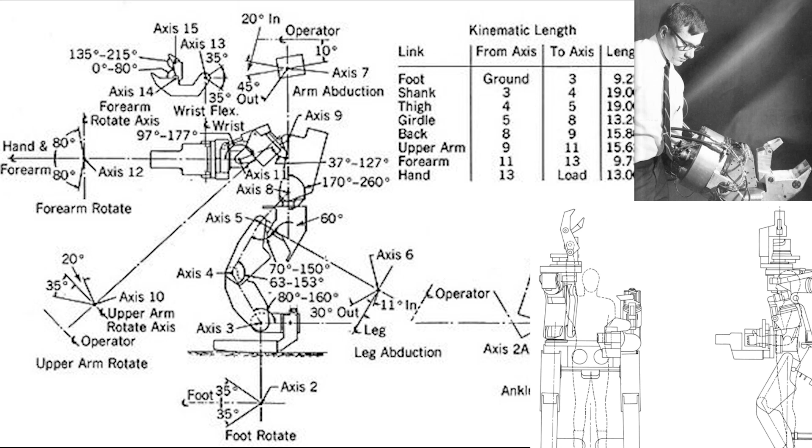This has been quite an opening curveball for me, I should say. Learning the drawings we came across are incorrect, and that there's a lot of steps having to move backwards to be able to move forwards. I've got a few things from doing my own homework to show you. I'm going to do my best to keep my videos a little shorter and not rabbit on, so I'm going right into it.

So let's shrink this down a little bit, nice and small.

Last week we were able to confirm that the drawing we were originally using is not the drawing we thought it was. This one is not Hardiman. We know for sure by looking at the evidence of the drawing itself. So sadly we cannot use that one, which was disappointing because I was quite confident it'd be a good one.

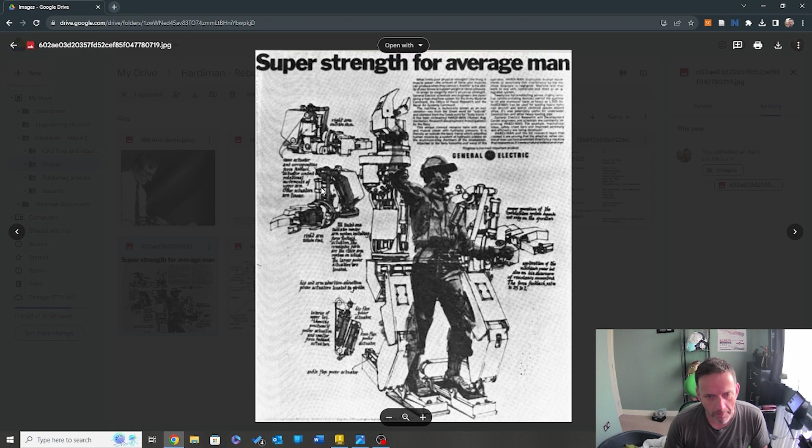So doing a bit more digging, this old newspaper article has little pieces here. It's not very clear, but you can see there's a T section where the arm actually sits. Then I was able to come across this in a book.

Again, if you look, we've now got this T section here as well. So the original presumption we're starting to make about this design means we're making the right move by going backwards.

So if that's the case, what we're now going to do is take a few steps backwards, maybe a little bit more forwards. I did come across this little bit of a gem.

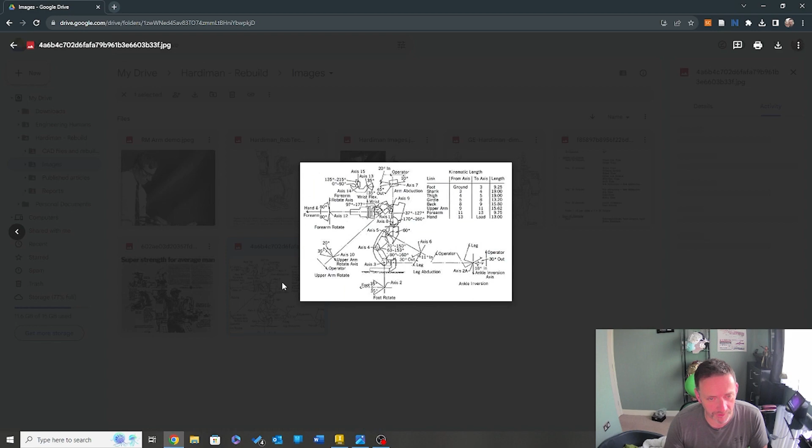I actually downloaded this one, so let me just pop this across. This gives a little more insight into the actual geometry itself. Not perfect, but it gives us the overall piece structure there. Oh my, look at that.

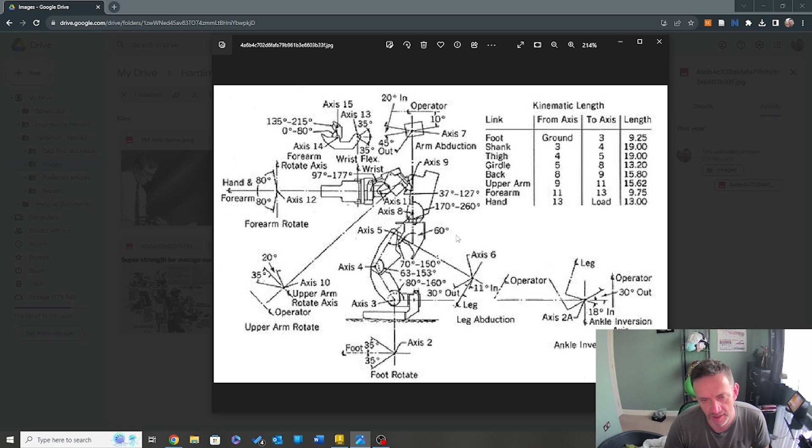So we're going to try and play around with this and see what we can get. There's a few options we can do. We could trim this image down and place it into the actual model, and then just reverse that process.

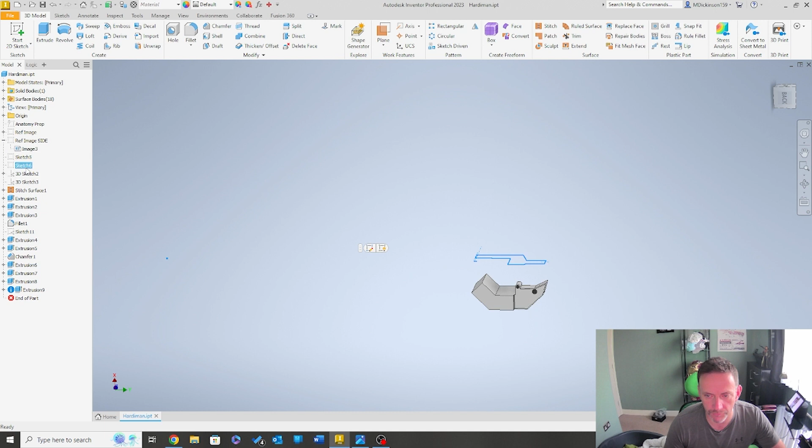So we go back up to here, and what we're actually looking for is the original anatomy pieces we're getting, and all our reference images. I don't want to jump too quickly back into changing all that out.

It took its time to get that far, didn't it? But one thing I've learned in any of these types of things is never presume that you know it's all sorted, when sometimes it really isn't.

Okay, we can see that geometric piece is probably quite a good one. What I might do, let's do a little experiment here. I'm probably going to save a copy, so I'm going to go V2.

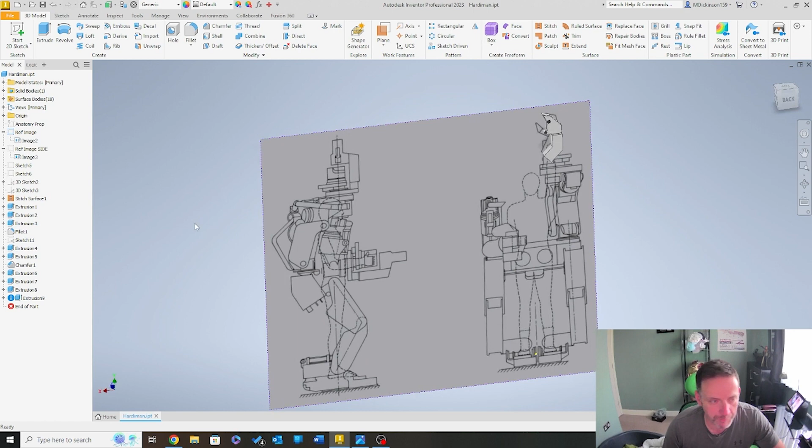With my V2, this is why I love Inventor - I mean Inventor, SolidWorks, they've all got their cons and pros with this. But what I can do is come all the way up to here and just go delete, because I'm in V1 right now.

Oh, nearly made a mistake, let me just close that. And then I'm going to reopen V2, which is what I just saved. So on my V2 now, I'm able to just go straight into here and know that V1 will at least hold its original processes.

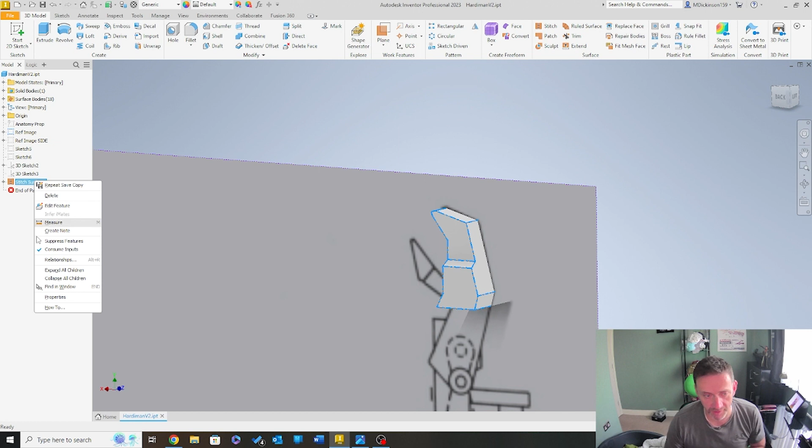So from here to here, sadly, I'm going to take these steps back. Feels like a real pain, doesn't it? You kind of go, oh what? Don't get me wrong, if it's annoying you, believe me it's annoying me just as much. I just think it's well worth taking a bit of a step back and deleting that out.

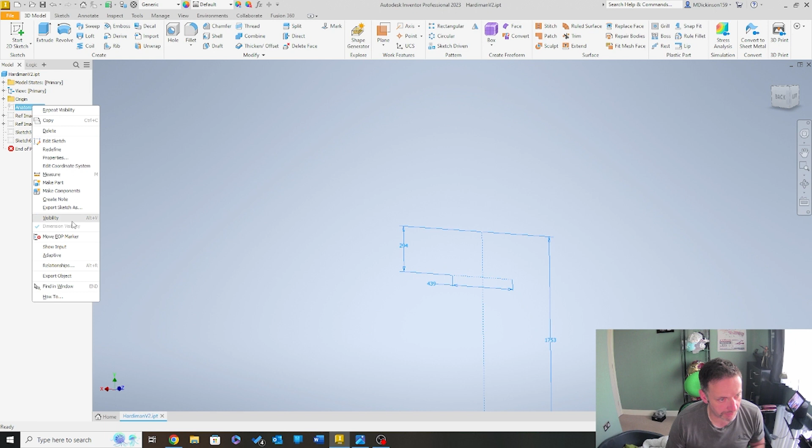Sadly, this drawing is not correct. So I'm just going to hide that out, bring in our anatomy, our original - because don't forget this is based on Moshe, based on Moshe being 5'8" from these pictures.

Now what I'm going to do is, let's have a think. The hardest thing here is we can only assume that his arm was here, or the arm would sit here.

We don't have a body in this, which is a little bit annoying. But we have no body in this.

The only thing that does worry me here is if we come back - and I'm going backwards and forwards here, as I said this was going to be a live thing, I have not practiced any of this at all.

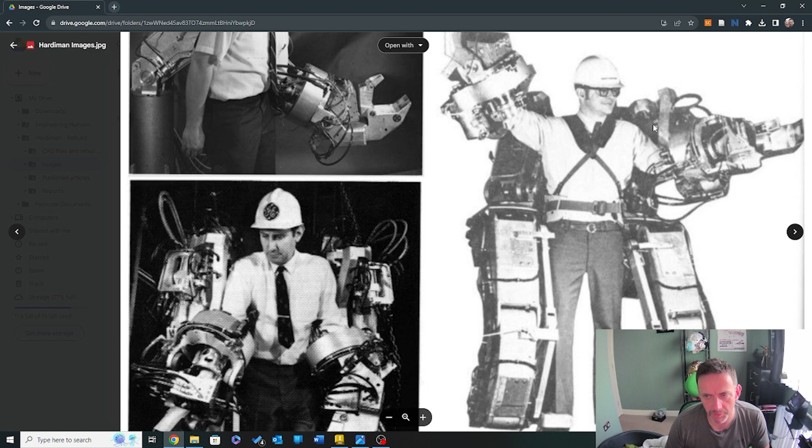So if we come back and take a look at this now, it does drop beneath his shoulders. Okay, maybe it is - I'm always really curious, conscious now of that.

This may not be what we're looking at, but based on these drawings, based on that profile, down based onto here, I'm thinking that could be our golden egg - that piece.

Side profile of that, between that and that. Let me just get that up. Side profile there to there. I think that is the golden egg in what we're looking for here. Genuinely do.

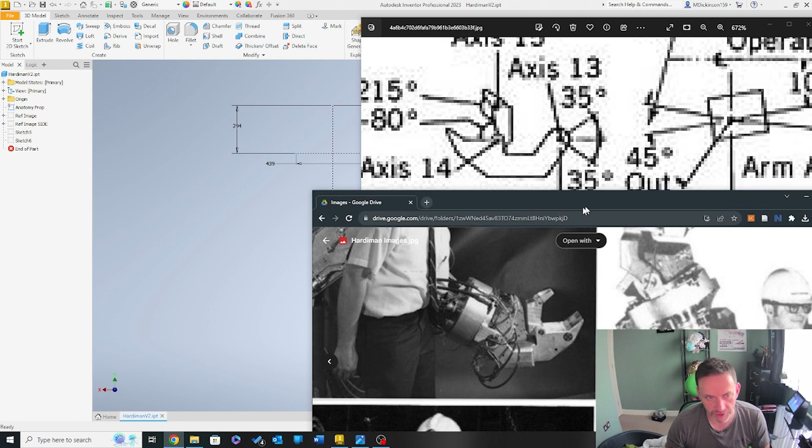Tell you what, I am going to take a step back. I'm going to go back to my original design, and I'm probably going to put this straight over the top.

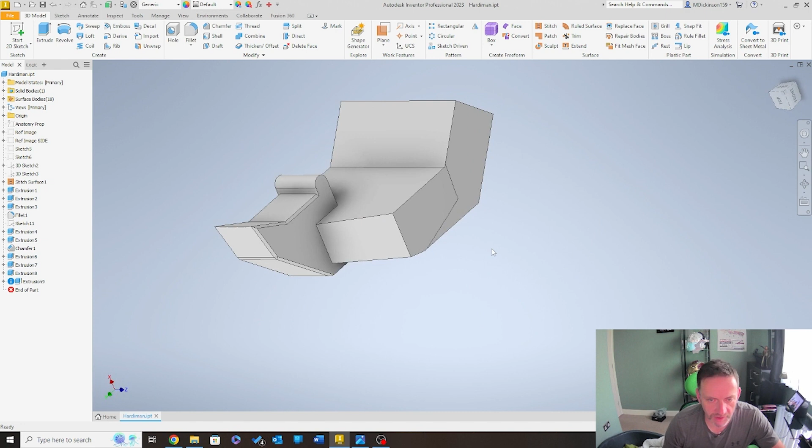So let's spin it round and let's have a look, see what we're getting. I'll come from the front plane in this case, and what I'm going to do is do like I did before. So I'm going to go sketch on this plane here. So let's go for my origins.

And I'm going to go image. Come to my image. And let me just see what I've downloaded. Where is it? There it is.

I knew this would be the case, because you remember when we first brought these images in, they all needed to be rotated and changed and things. So what I'm going to do is just rotate this to get it into position, and then I will scale it up.

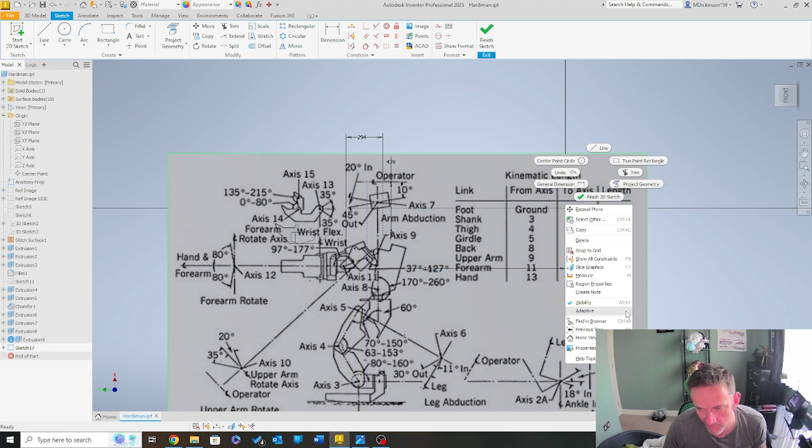Okay, so scaled it up. Got a little bit more to fit. Now let me just come to my image. I'm just going to make this image a little bit more to work with.

So let's come out here, and I'm just going to come back to my image process here, and then turn that off for a moment. See here, what I actually ended up doing was bringing in another alternate, spinning this down just to take a look. So what I'll do to my original prop, I'm just going to make that not visible anymore, make this now visible, and now what we've got is we've got geometry.

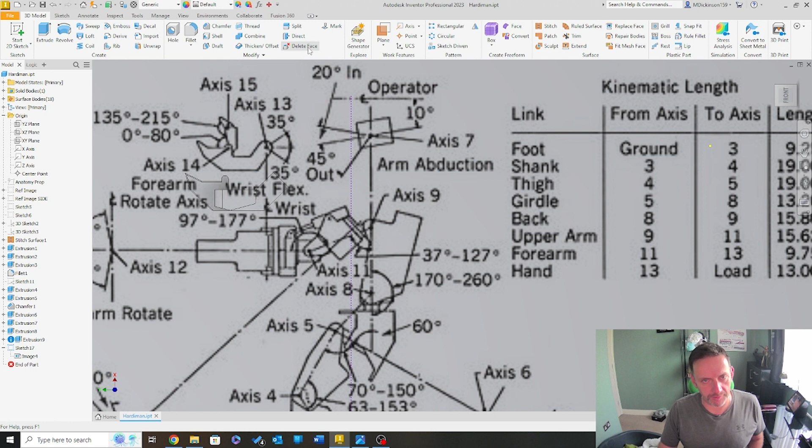Now we're in a key position now. Do we A, keep the original piece that we're chopping away at, or B, take a small hint, chop that out, and then build in that? I'm going to take the latter. I'm going to delete the entire bodies out.

I know this seems a little bit chunky what we're doing. It is very clunky what we're doing. However, I'm just determined to see, because this one looks a little bit more promising for me, this geometry. And I think using the reference images that we got, we can actually take a step back and try and find if this is the right way of doing it.

So what I'm going to do quickly is sketch probably this profile, and then because I have a key profile here to guide me, I'm going to make that a little bit more like what we're after.

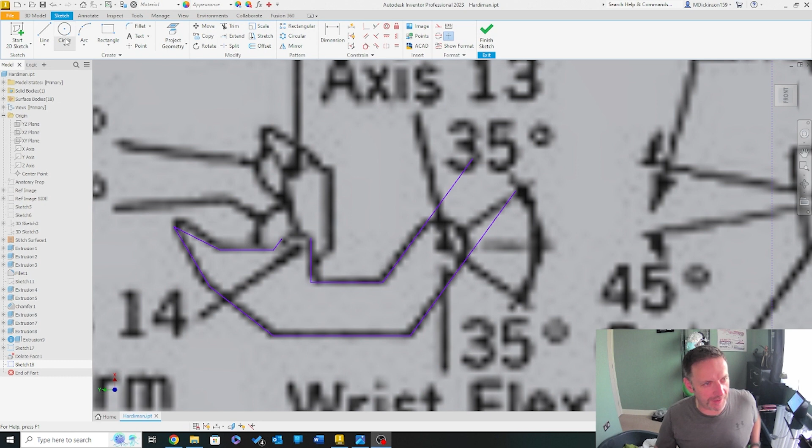So here goes. Okay, I just thought I know a few will be thinking you're cheating, turning it off like that. So what this allows me to do is just check. And what you'll see here...

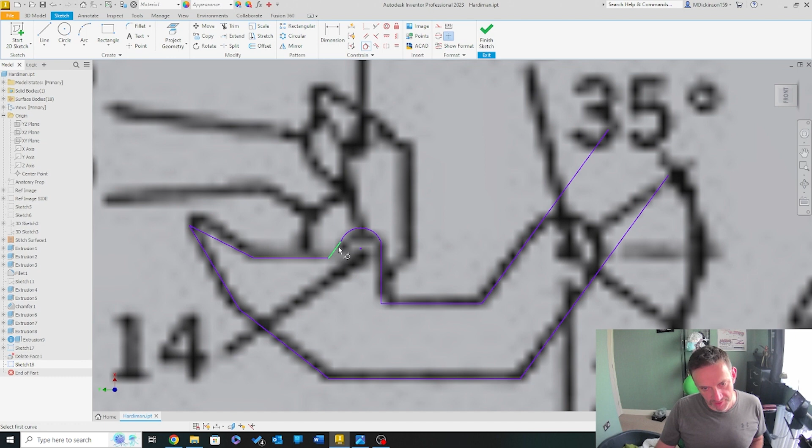is I'm just bringing in the overall pieces. So I'm going tangent here to here, and I'm going to tangent here to here. And yeah, granted, it goes like that. So what I'll do is bring you and make you one.

And amazingly, that is not quite there, is it? I mean, look at that. Bring you out, top you out here a little bit, and then because it makes me think, you know, last week chopping away that image about that model, trying to make it fit, and now you look and go, yeah, you know what? That could be the deal what we're after right now.

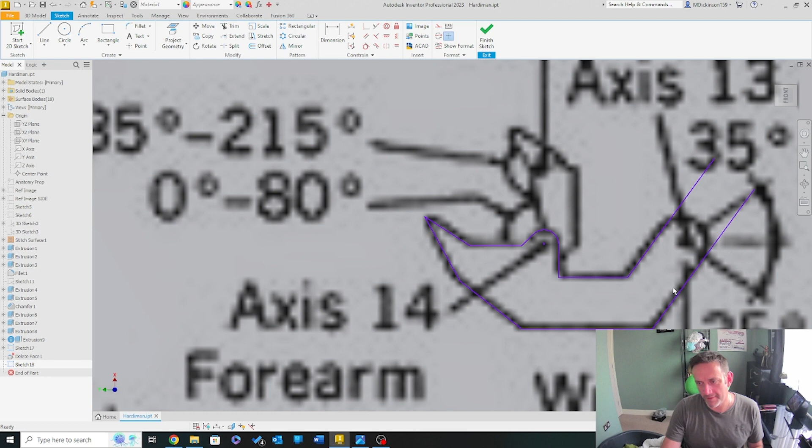Okay, so what I'll do here is place the circle in the middle and then just throw myself out like that. What I need to do is make this line and this line tangent, and this line to this line tangent. Whoops.

There's always one, is there not? So let's lock you out for a moment, and then what I'll do is tangent you to you. Okay, I'll go tangent you and you. I'll go tangent you and you.

Okay, so that's going well. It's going really well. Let's just... tell you, swear to God, and that's there like that. Was it really that hard?

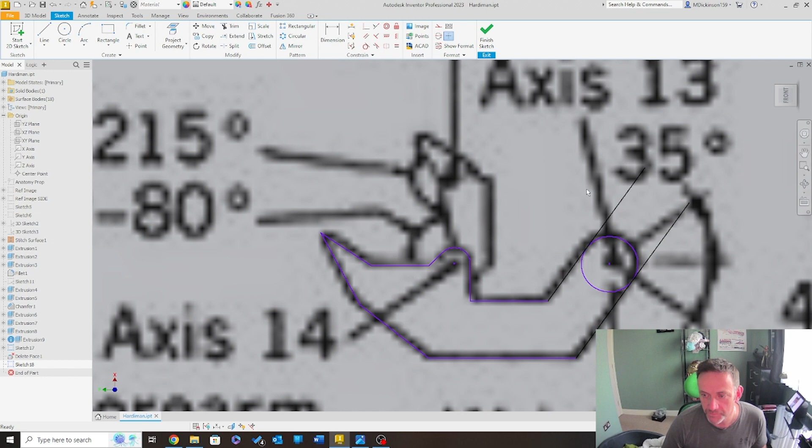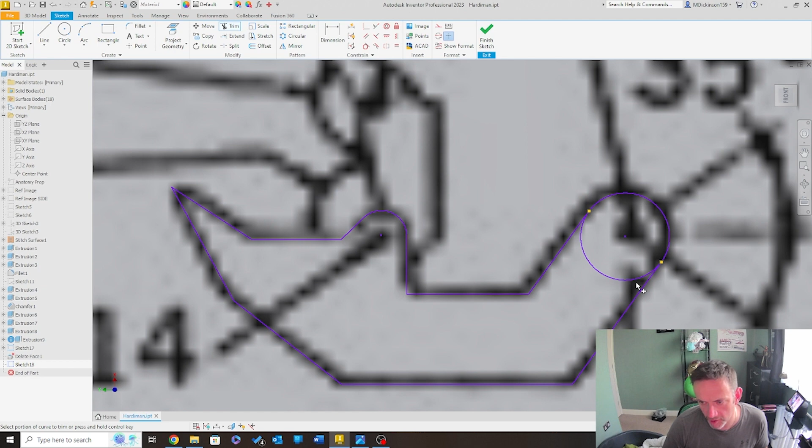I'm just going to pull them out, and pull that not tangent. Lockout wherever possible — my experience says do not leave locks on. If you have locks on, it's going to be problematic. You're going to have problems going through.

So what we get now is something a little bit more cool, am I right? This has been scaled to suit. So I'm going to do something which few of you will be thinking, 'well, that's crap' — but it's really not. I'm just going to take a dimension from here.

Now you look there, that suggests the dimension itself is 174.292 — yeah, 175. So I'm going to go 175. Let's go into extrusion, and I'm not going solid, not just yet. Also, I'm going to go mid-plane at this point — 175, we'll go in mid-plane extrusion.

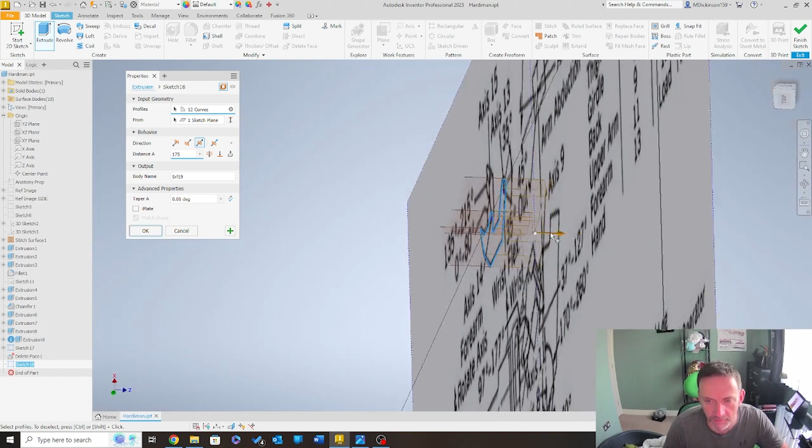Let's just tilt this over, take a look around what's going on. That, you see, that for me is looking good. It's looking really good. That's really, really what I would be after at this point. So let me just hide that for the moment.

Yeah, I'm quite pleased with that. I know you've been thinking, well, is that everything? It's really not. So let's make this back on.

What I need to do is take — there's a few ways of doing this. I really like some of these sneaky, horrible, cheeky ways of getting drawings on. So let's get some of these cheeky ways going, shall we?

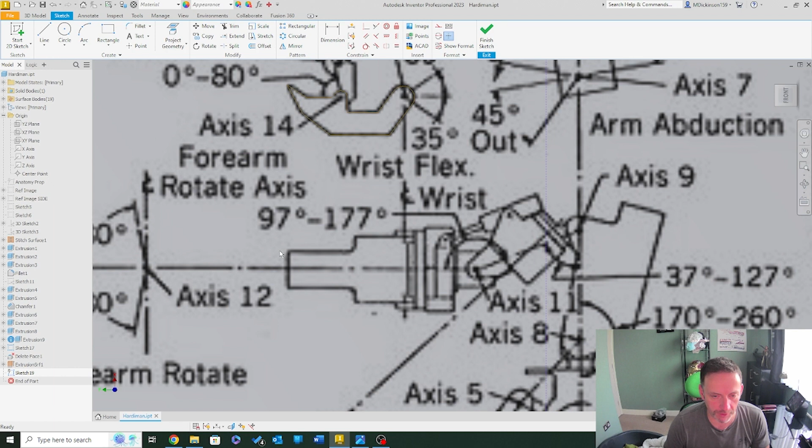Right, so we know that this is our overall geometry. We know that profile is the actual shape it should be on the downward projection. So what I'm going to do is trace it, because that's what all the cool people do.

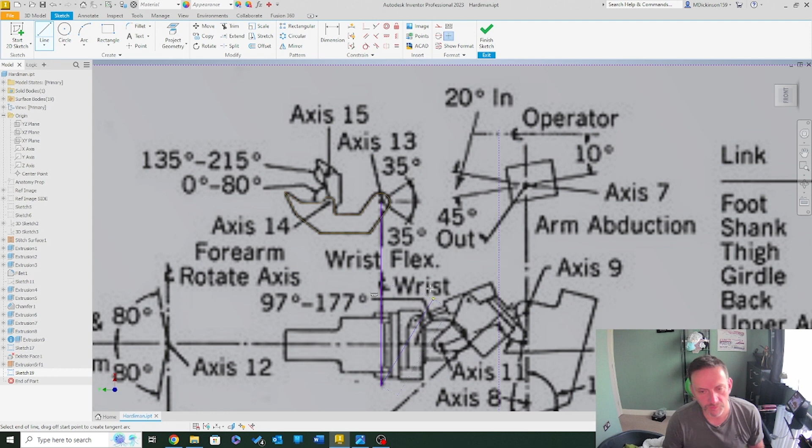I've got to laugh because I'm just really not funny. What I'll do is, first things first, take a key point for that drawing here. This now becomes for construction — all I'm doing this for is to give me an idea of where everything sits. So we know that, right?

Now look at that — this actually comes back to the original drawing when we were looking here. We're looking at that, look at that. Oh, I can't zoom in any more. But you can see there we've got a slight protrusion of the nipple. That suggests a slight protrusion. Boys and girls, we may have a winner.

But again, let's just focus on this grip. To actually get this grip over the line is too exciting right now — too exciting. So we know that we've got some key dimensions here, but let's get back to it.

So all I'm going to do is take a line to here, take a line to here, and take a line to there. I'm going to take a line to there.

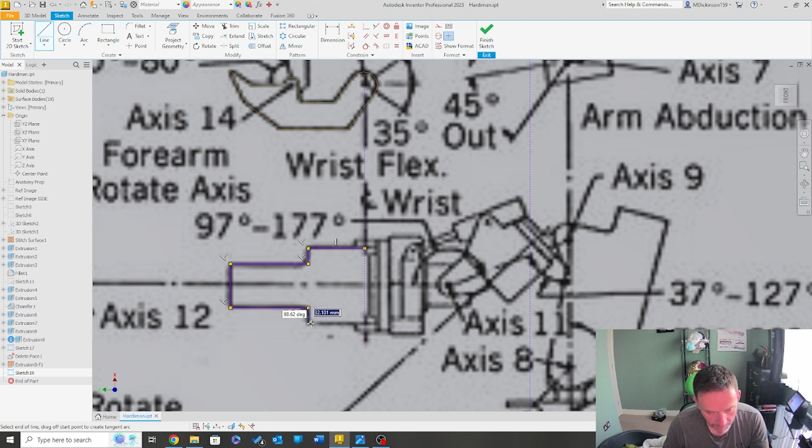Now let's go all the way — I think there's a song in that somewhere. Yeah, let's go all the way on that. Now that's to the actual ankle axis point, yes?

So what we'll do is we'll take that up there as well, take that across, and take that down. I think what I'll do, yes, I think I'm going to exploit symmetry. With what we're looking at here, we're now going to get to a position where if there are mistakes, yeah, there's going to be tears. There's just going to be tears.

So what we've got to do is try and figure out the best way of being able to get the most engineered piece. Because in many ways, what we're doing here is making it up as we go along. It's the area where everybody frowns and gets really nervous, because you are making it up as you're going along.

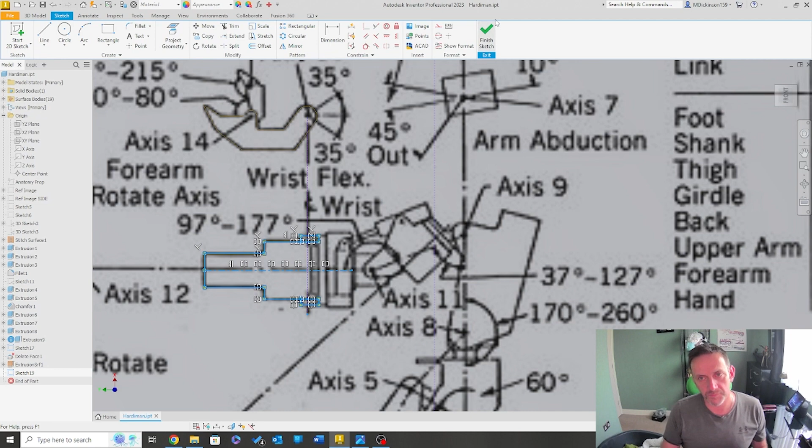Press Control and V — come on, there you go. You see here, it's taken what we had and pushed it across. Let's move the overall geometry, bring this down to here. Whoops — no, it's not what I'm after. Right, so there's something here that it's brought across.

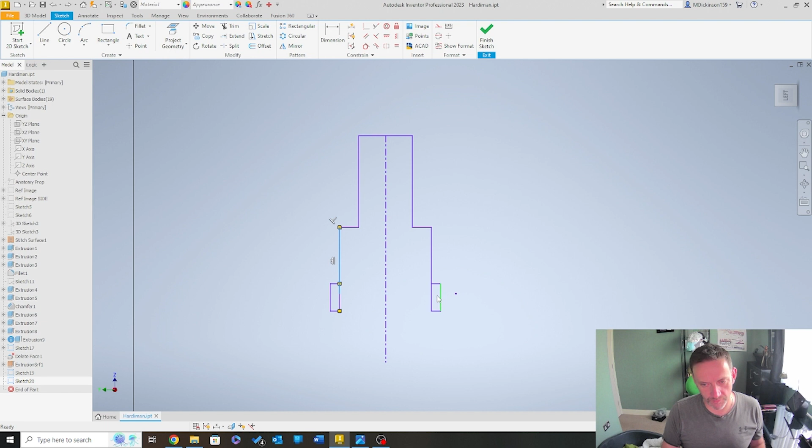I suspect it's because it has symmetry somewhere. Let's have a look — yeah, because that's a symmetrical reference, it's panicking. So what we're going to do is just take that half and move it. If I take the whole half here and just move it — you see there, it's now said, okay, cool, I can do that.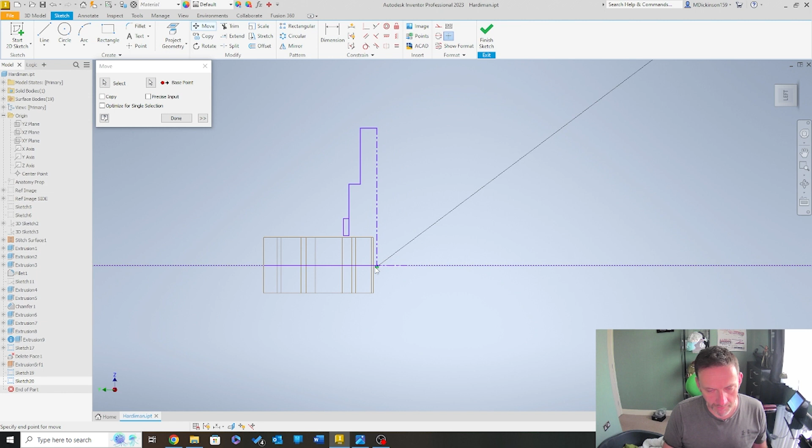So now what I'm going to do is place it here, and I'm going to rotate my geometry from the base point here. And no — whoops, I'm just going to bring that 90 degrees like that. Right, so I'm going to move it.

Sorry guys, one moment. I forgot to grab the piece of geometry on this edge. Keep it for construction, that edge.

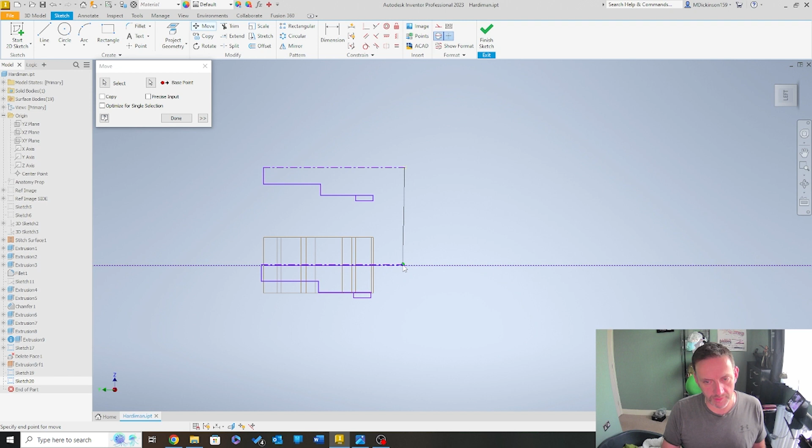What I'm now going to do is go to move the geometric piece from here, stamp it on that point. It's not... oh, you swine! It's still not snapping. Okay.

Try to come into geometry here and make that like that. So again, that's not converted the model. Well, all that's done here is just give me a point of construction that I can use, I should be able to use to assign to.

So let's get this across. Go to move, snap you onto here. See that? Finally got my snap. Didn't get my snap there.

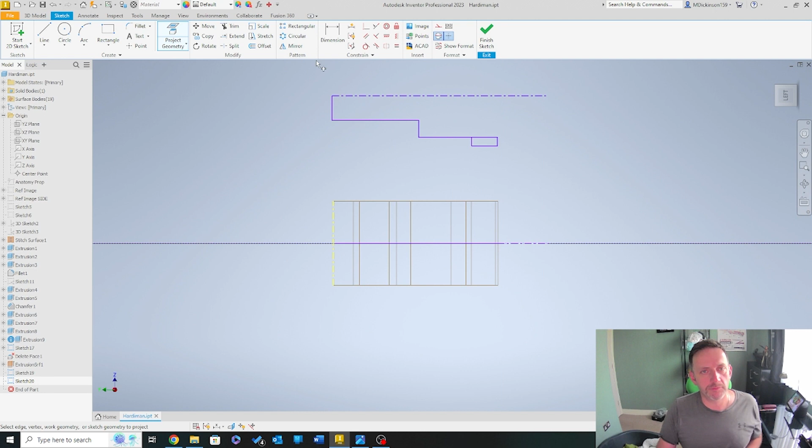One second. I'm putting too much emphasis on this, but I just want it right, you know? No, let's try that. And come from this point. She's snapping, but it's not snapping like I wanted it to.

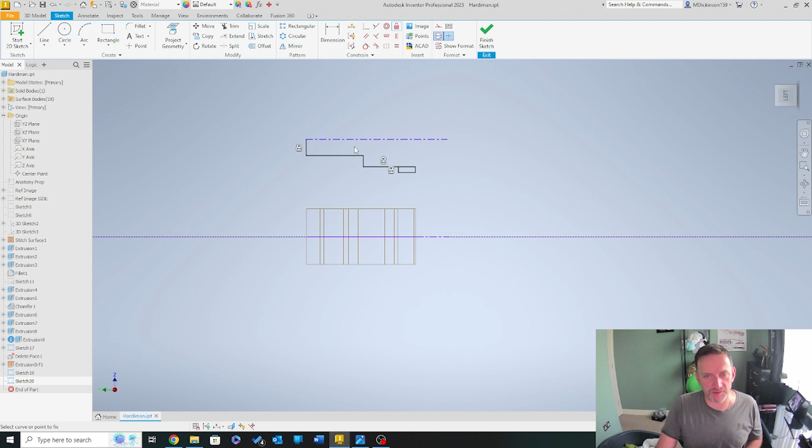Okay, so what I would like to do though is I'm going to hold the geometry in its actual piece for dimension, because as much as this is just going to be like a chopping block, I actually don't want this to change. So that's why I'm doing this. This may not allow me to move. Oops.

I'm making a real pig's ear of this one. Absolute pig's ear of this one.

So let me just spin you up. Where's that coming from? Give me a geometry there that I don't want. Okay, so let's just turn you off, and turn you off.

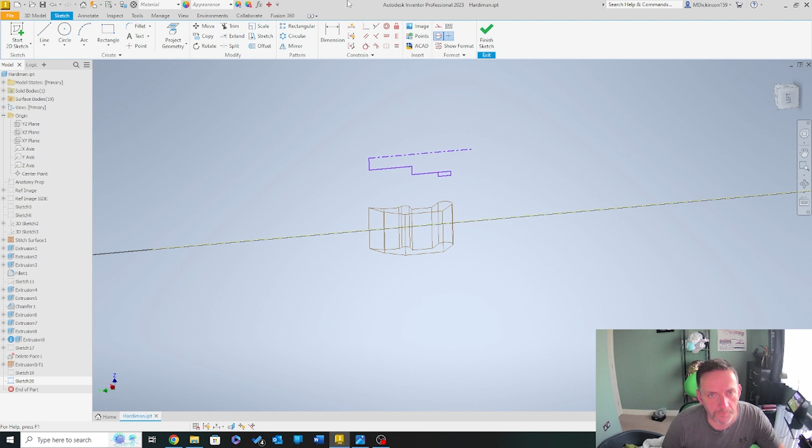There we go. Right, so I was getting all these pieces on there, and it was driving me insane. What was working, what wasn't working, what's good, what's not. My goodness gracious me, you know.

Okay, so what I'll do is I'll dimension. The reason I'm dimensioning this is I just want to hold its position. When I go to move this, it will have an absolute meltdown if I've not. And I'm just doing this for.

Oh, I don't need to do that. I'm just doing this because when I move it, I want it to hold. That's all. Have I already done that? Oh, I have already done that. Goodness. Okay, so now I'll go to move.

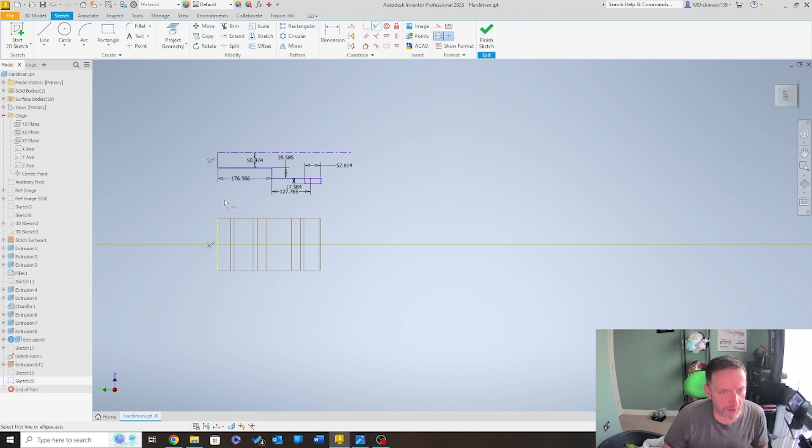In fact, first things first, I'll make this here in line with this. Oh sorry, I'll do a collinear. I'll do you and you in line. So that now holds in line. And I'm going to do collinear, you and you in line. So that now places, boom, right over the top of what we're after.

And you can see there in itself, I'd slightly missed a few things, but that is okay. What we're going to do is make this work. That's the point. So now I'm going to mirror.

I'll take this piece, this piece, this piece, this piece, and then build it all the way around. Take a center line from that point and then go apply. Okay, so we now start to get the overall geometry.

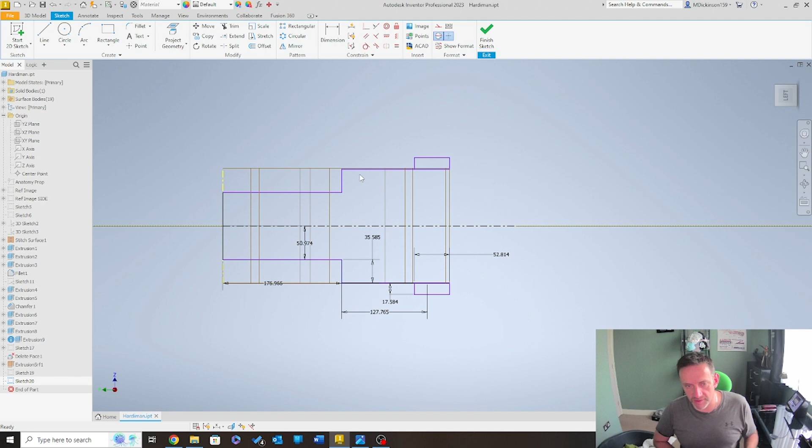I'm starting to feel a lot more confident with achieving this profile. So let's get back to it.

So what we can do is a few things. I can draw an oval shape, and I've done this many times before. So many people frown, they go, oh, can't do that. Well, you can. A lot of people don't like it, and I get that. But if you want to get some solutions, if you want to get some answers, get things going, often it's a way of doing it.

So what I'm doing here is I'm creating a window, a point that it can be chopped. So I'm going to click OK, and then let's get to some visualization. See that? That's where we're at.

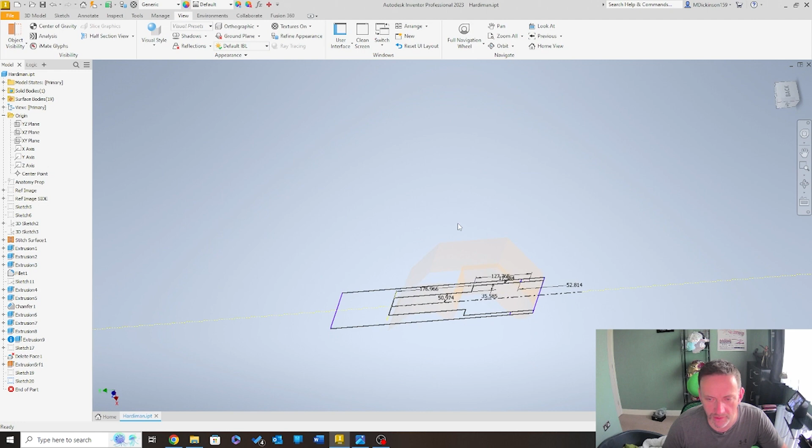That's what we've got. Now I need to start creating that famous 1960s shape. 1960s, boys and girls, that is crazy. 1960s. Anyway, yeah.

Huge. Right, cutting tool, so trimming, good. I know I'm not explaining this a lot for this one, but the idea of trimming, the tool itself, we've already created this with this sketch.

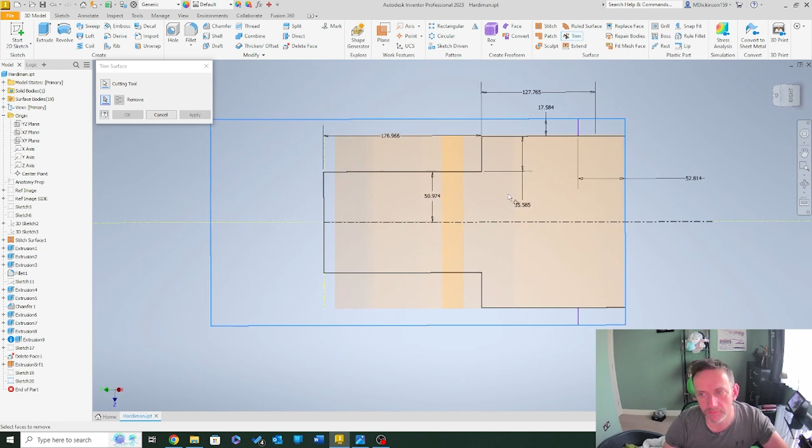And okay, so yeah, I'm going to need to go inside. So with this sketch, what I can do is start to separate things out.

So you see there, it's already highlighted key areas that can be chopped, and it's just projecting, and it's a really old school Boolean. So many people frown and they kind of go, yeah, but who uses that? Everybody uses that. It's the most useful tool in the blooming world.

Okay, now you can't really, I'm guessing you can't really see that, because I know one thing, I can't really see that, so if you can't see that, I'm sure as hell I can't really see that. Let's put some lines on there. Oh, hello. Oh my god, look at that. Oh my giddy aunt.

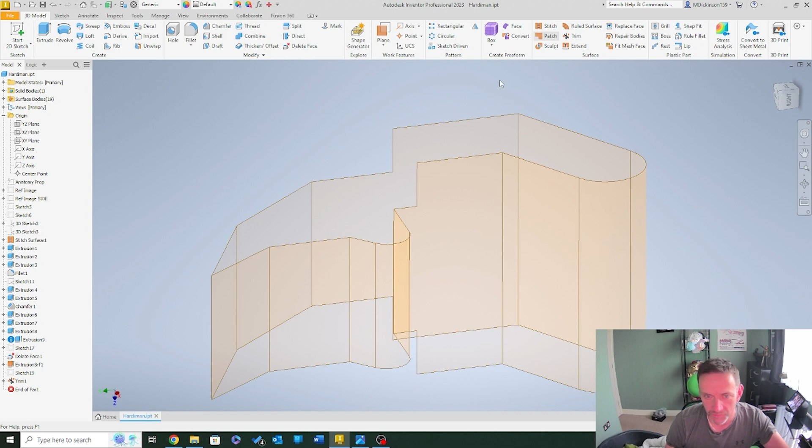Oh my god, oh my god. Okay, I'm a little bit excited right now, and if you've been on this journey of trying to figure out what decisions were made on the Hardiman with me, you'll know the waste of time the first few videos were.

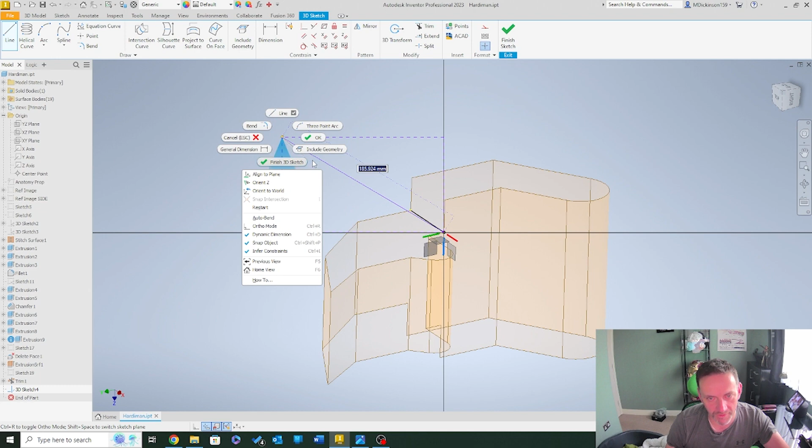Okay, oh my god, this is exciting. So let's get into here, pull it across, and then go okay. And I'll do the same again. Let's take it up to another here and here. And I'm gonna go okay.

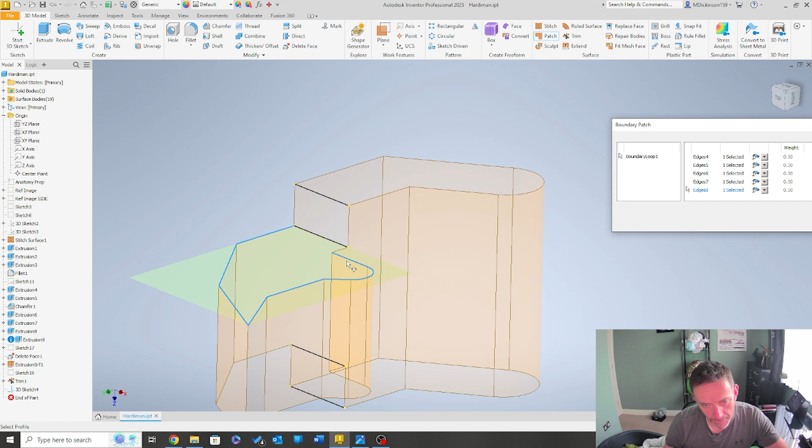Right, so let's get back to it. So I'm going to patch it in, just patching in as normal. Snap it in.

I'm really extremely pleased, if you guys aren't I'm surprised. Yeah, it appears going this decision, taking this process down, has been far more profitable than what the alternate was.

The good thing is we tried it, we've checked. Is that a drawing that's worthwhile? Is it something we can use? In short, it isn't.

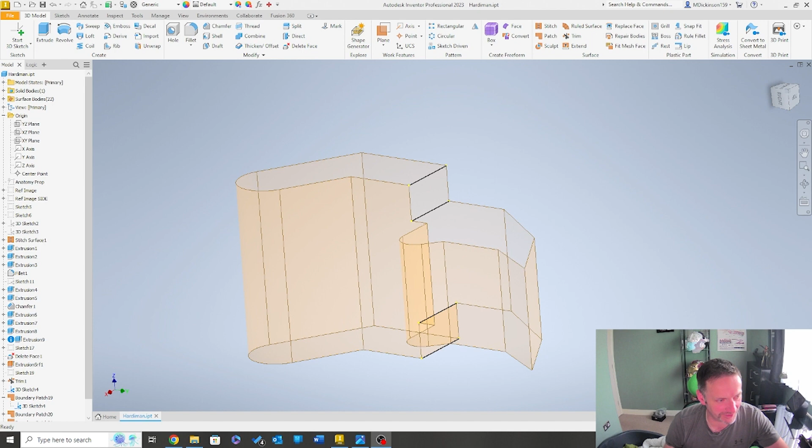However, this - oh, look at that! Oh my God, I'm so pleased with that. I am so pleased. One second, you guys, I'm gonna just get this rest finished, and then I will catch you right back.

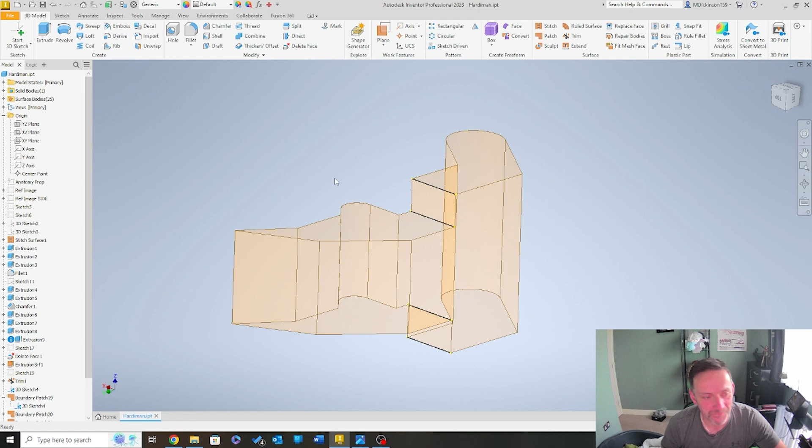Okay, so I just - whoops, wrong button, and there's me praising them. Just taking the whole thing round. I'm extremely pleased. I'm only laughing because of the amount of time we spent on the other one. I mean, I'm so happy, I'm so happy with that. That looks correct to me.

And based on what we got, we are going to have to do a little bit further homework to figure out the sizing on this to make sure it's correct. But I'm willing to bet you the geometric representation of what we're looking at here, boys and girls, is the right one, and that's extremely exciting. We could make this - just look at this piece as an overall geometric piece. I am getting that confident that if you are a UCLan student and you're following this, we can probably build at least the arm this year. That is exciting.

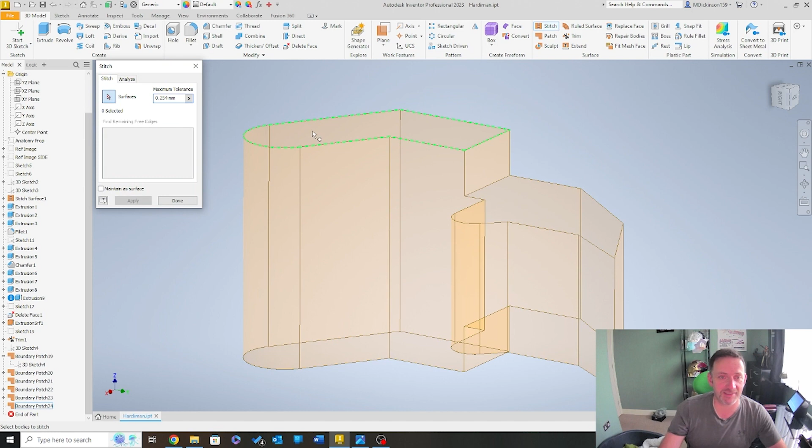If you couldn't tell. Okay, so let's go apply. Hell yeah! Look at that, look at what we got. We've got a fingernail. This is looking good, oh yeah, very pleased.

Okay, so before I get too carried away, let's get back to the original drawings. Let's get Mr. Mosher on the screen. There he is, with his big chunky arm.

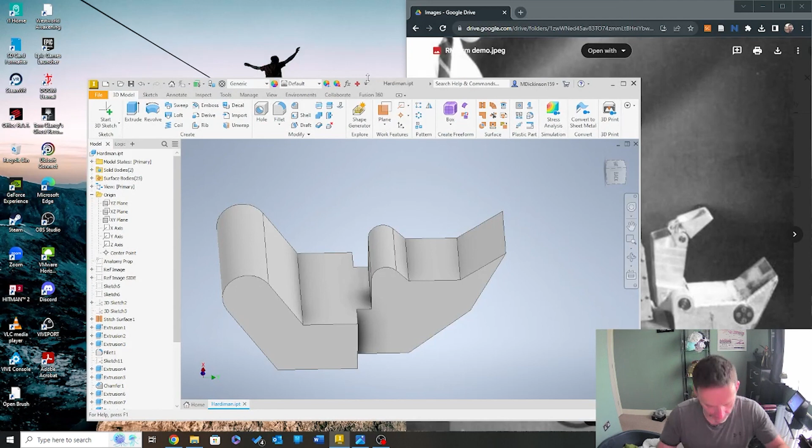See here, they've obviously got fillets on there. Fillets, I mean, we'll go with fillets - you could argue chamfers. So with that side of things, we are going to just do a little bit of oohing and ahhing to get this working. And that is a separation piece, which I think is on that little drawing that we have. But let's get on here.

Let's just quickly get some fillets on here, because I think they're there just because you couldn't leave a huge device like this with large, dangerous pieces like that - you just couldn't do it. So I think that's what we're looking at. So let's just take a piece like that, I think it's a bit bigger, so we'll go 4mm. Let's go 3mm. The same over here, like that.

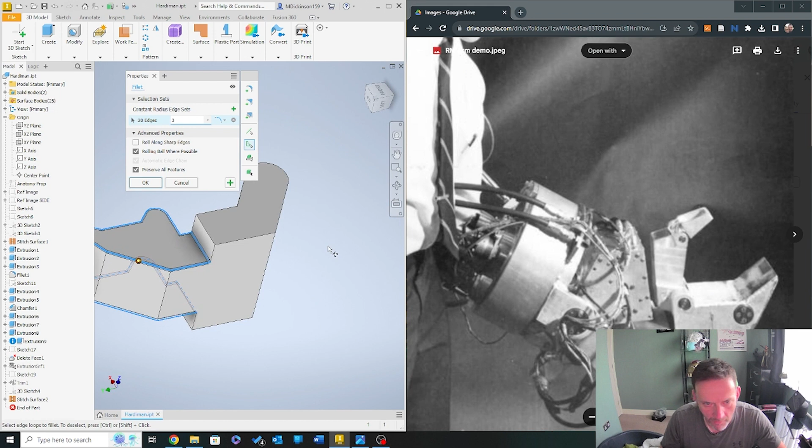Okay, so I'm going to add another. This is cool, if you've never done this before, this is really cool what it can do. Oh, I just realised something - never mind, I was just going to take it through and do it that way, but I've just realised I need quite a large radii there. So I'm probably just going to go something like 6. 6 here, 6 here. There. There.

See, I mean, they weren't daft in the 60s. You know, they were thinking about these things, these all-important elements. So I'm going around key points of that - they were thought about, people injuring themselves, scratching themselves. They were very, very good at what they were doing.

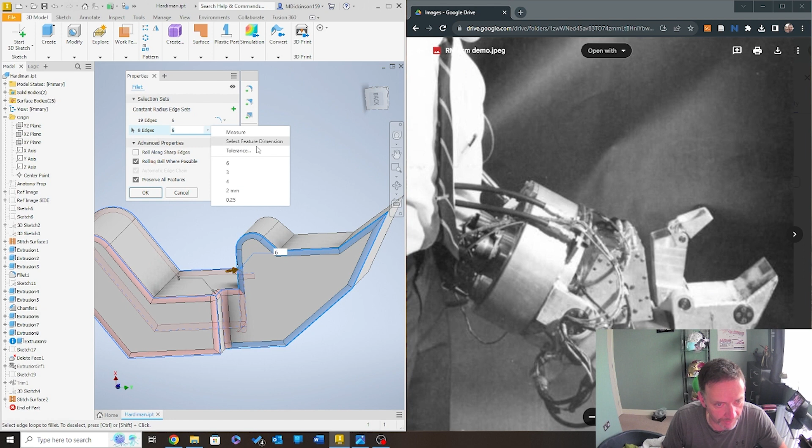And again, if you've not done already, do check out the original podcast from Bill and Nora about this. They really do a great piece on the Hardiman, and I cannot praise it enough, it's such a good one to take a look at. So I'm going to bring that back down to 3, and bring this back down to 3 there.

You see, I think it might have been on there, but oh, look at that. Right, so we look on here, and now what we're getting is, oh my God, it's starting to look good. It's looking good. Look at that.

Now that's not what I'm wanting, bigger. Pop that out, I'm going to add some more. So this now I'm probably going to put on 12, a large radii to show that overall structure and support like that. That's right, look at that. Perfect. Into that edge, onto there, and onto there.

End piece. I think it would have had a radii on there. I mean, as I was saying, I've just been praising them for being really wise and clever, and they wouldn't have made it too.

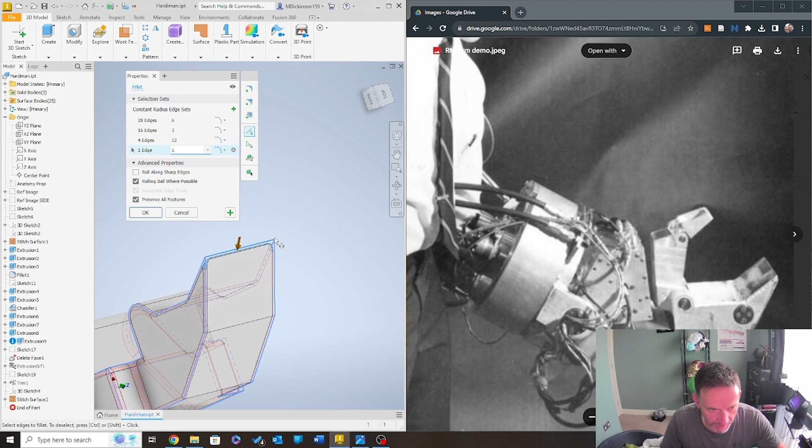Oh my God. Oh my God. Perfect. Oh, look at that. It's a little bit out, isn't it? But we can change that.

I'm looking at that section there. I'll come back to my fillet. I suspect my fillet's not done that any good. So let's come back to my 12s. I'll drop that fillet out to there. Okay, I think that's good.

I think that needs a little bit of modding, but for what we're looking at here, I'm extremely pleased. Finally, we're making some progress.

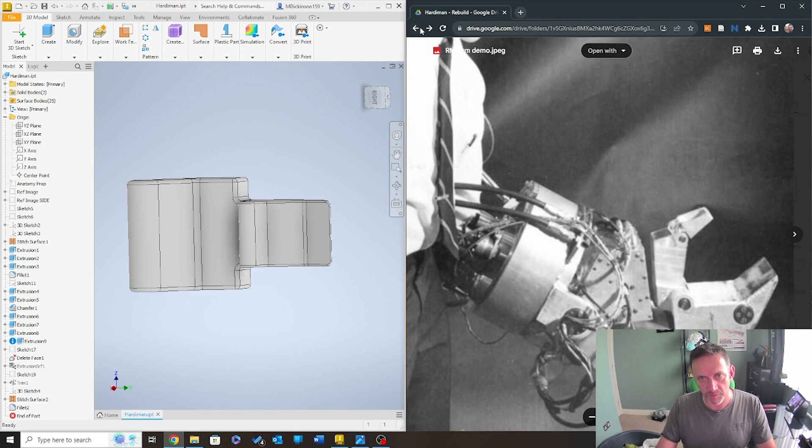And based on the actual piece, let's just pull some of the reference pieces. Before I get too excited, let's just pull some other reference pieces. Come on, there we go. Let's get back to some of the reference pieces. Let's go, engineering human. Oh no, it's Hardiman.

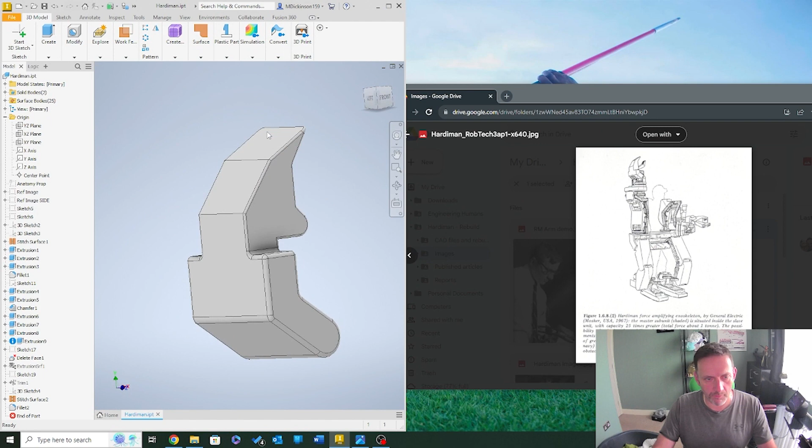Images, so under my reference pieces is here. So let's get on here. Yeah, you look at that. And you look at what we're looking at here. Yeah, happy days. Okay.

But we do need our drawing, so we need what that was attached to. Not that one. Not that one, I think it's this one. No, visible? Right, so there we go. We've got that all important piece now.

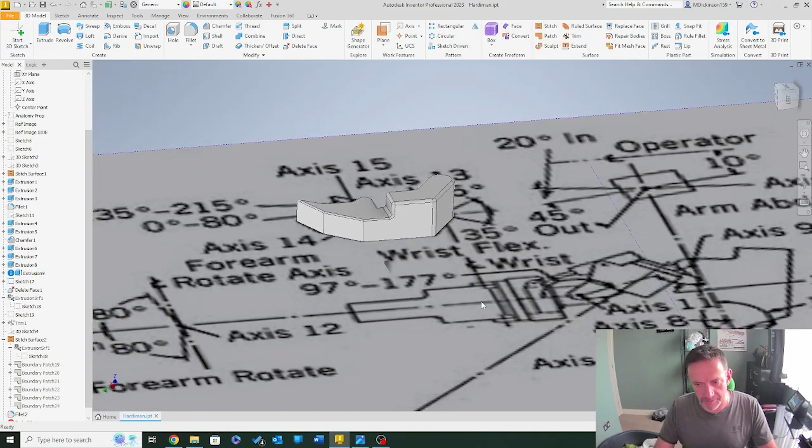What I'd like to do is perhaps build in these end knob bits, and then the problem is the end piece here. We have to make a few assumptions there. So now that that's there, now that I know that, let's hide that. And let's come back to the last drawing.

Now this is good. If we go back to the trim piece, and I open up on that trim, and just go to visible on that trim, we've got them built in.

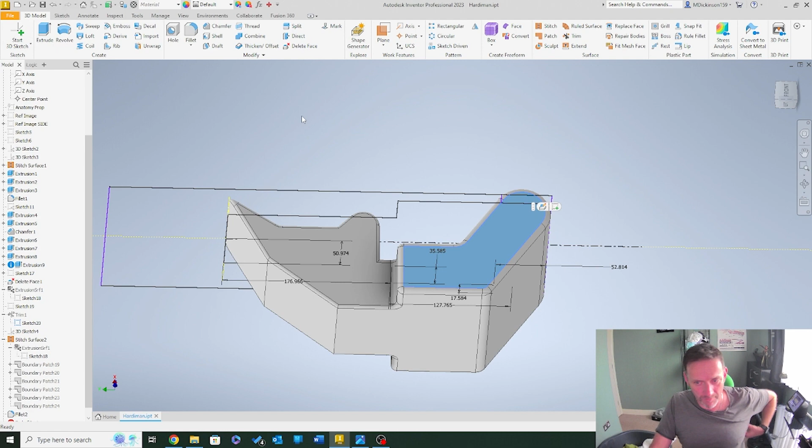And you're probably thinking, well, how are you going to do that? Simple, we're going to do a sketch. But I'll do a mid-plane sketch on the origins of this, so we're actually going here. So I come to here, and then I go on a sketch. I'm going to zoom that sketch in. And what I'll do now is just do a circle.

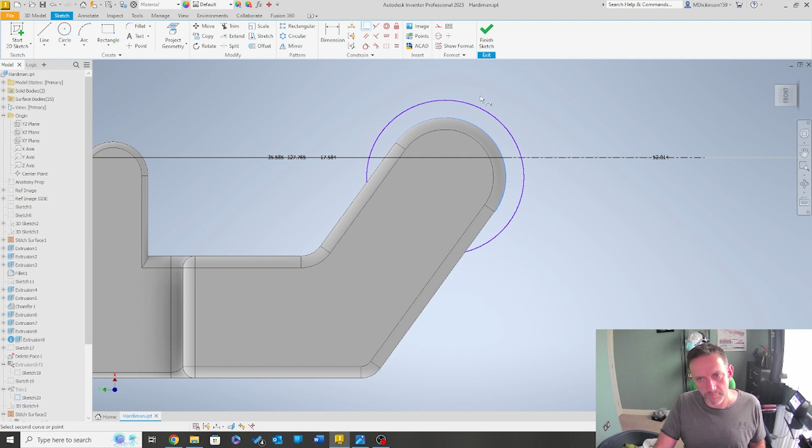And I'm going to make it tangential to, oh no, sorry, concentric. Concentric? Yeah, concentric. You know, you kind of go, does that sound right? It is, but yeah. Okay, now make them both equal, to you, right? You and you. Right, so now we've got there.

So what I'm going to do is I'm just going to do an extrude. And in my extrusion, I'm going to try and take it to the vertex. Now, let me get, where is that point? So there's two, there's 2. So I'm going to use 2. Can I use 2?

You know, you just want a point. It's like, give me a point, just give me a face edge every single time. No. No, that's never going to work there.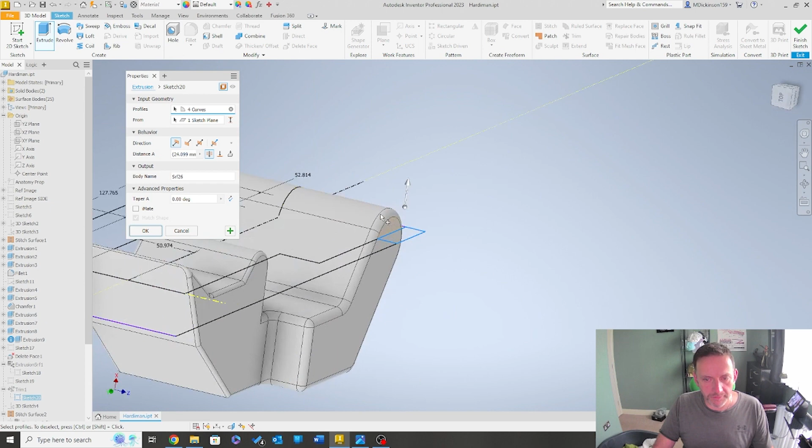Okay, okay, so I'll go curves, I'll go that curve there. And I'm going to go blind in this case. And then, because I'm now in a surface, I'm going to convert to a solid. And I'm just going to go, yeah.

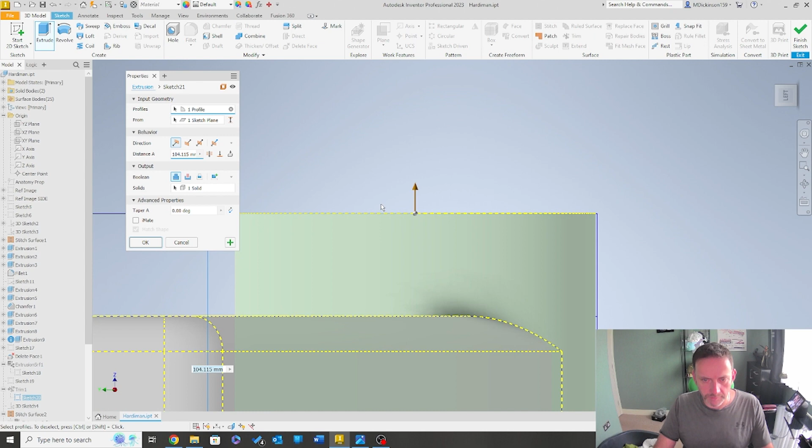Really could do with measuring this. But again, I'm going to go, okay.

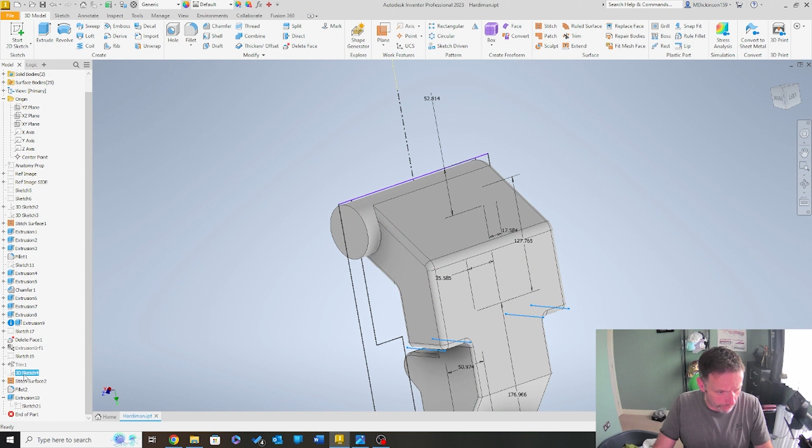Now, I hear you shout, what are you going to do for the other side? I'm going to mirror it. When in doubt, just mirror it. You know, use everything you've got to your advantage. It's all there, it's all waiting for the taking, you know. So use what you got to your advantage.

And what I'll do is I'll go to a mirror. I'm going to take this feature, and I'm going to make a mirror. I'm going to go on a mirror plane of my, let's have a look, YZ, XY, sorry. So XY plane up to there, then go okay.

Now what we got is we have the extrusion pieces that were marked on that drawing. Granted, they may be changed, we may lose them. But as long as we have them to lose them, we're in a good position.

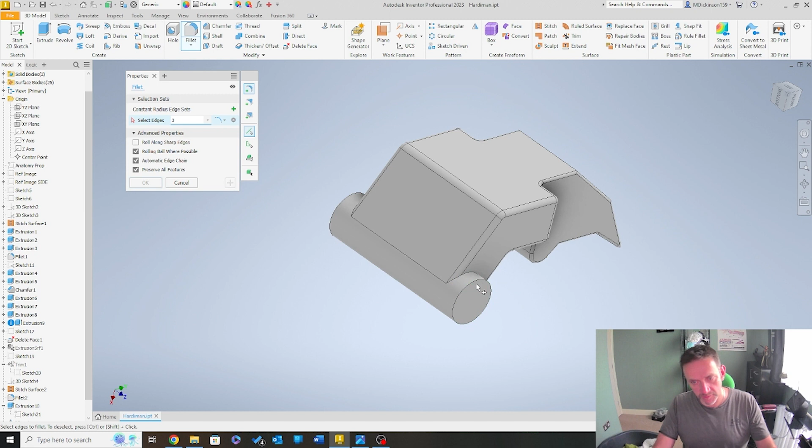So I'll go 3 on here and 3 on here. Bring that across here and bring that across here. So now we've got, oh, I'm so excited. I know, I apologize, I get overexcited, but I'm just excited to see what we've got here.

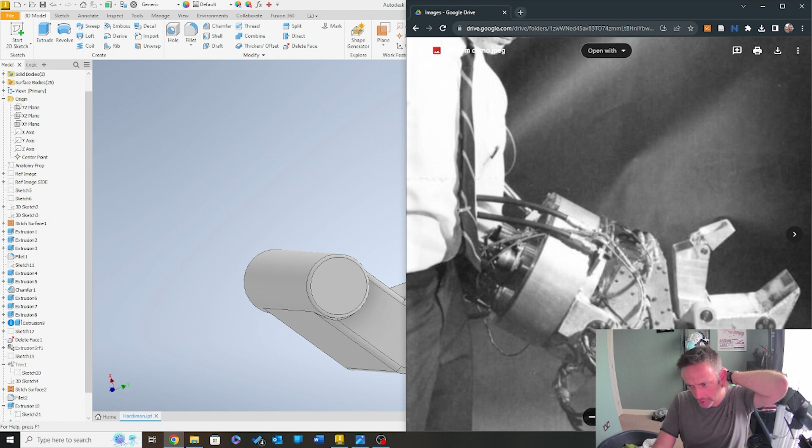So we've got these pieces. We've got an extrusion here, that's probably going to change, you can see where it's going to change. But yeah, we've actually got something here. So what I'd like to do finally, then we're going to get ready for next week. I'm just now going to cut the wrist plate to the hole and take a few dimensions, then we're good. So I'll come from my XY plane, my mid plane here, go into sketch.

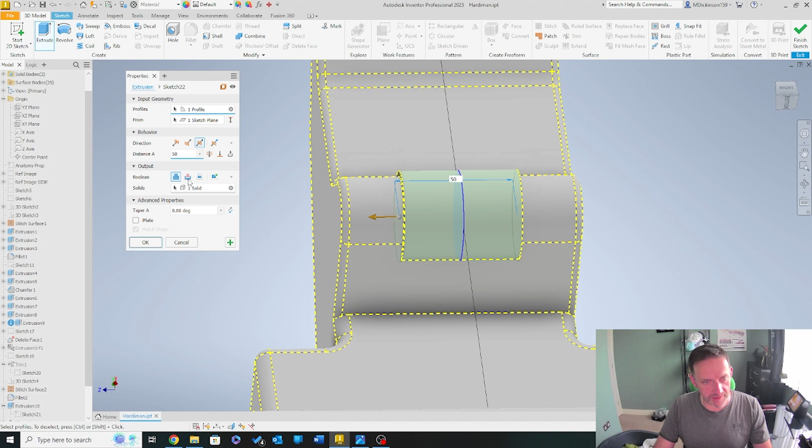I'm literally going to cut a small section of this out. I'm going to project to that circle and just cut. Now again, this is me just guessing, and I know guessing is quite a dangerous position at this point, but I'm just cutting this to make sure we have an overall shape. So let's go mid plane, drop that to 50, and take this as a subtraction. Click OK, and then we have a point where that may sit. 50 millimeters as a hole size is a very reasonable size for me, that's what I believe. All I'm doing here is tidying up around that area to show where that would be.

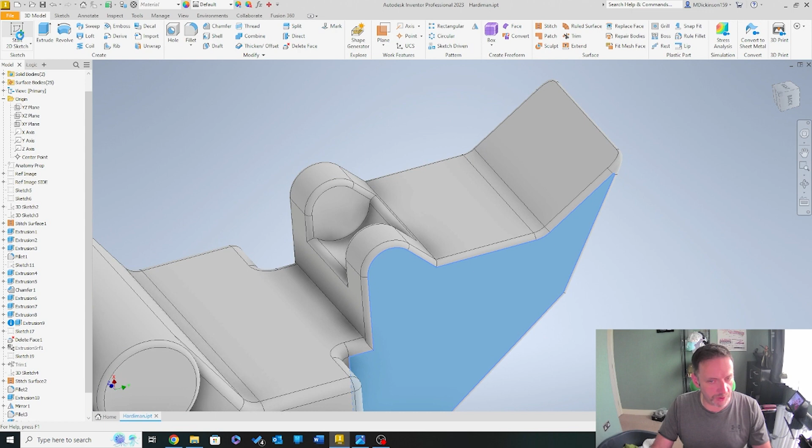Finally, I'm going to come onto this plane and just cut the hole out for where that pin actually goes through to create the unit. Based on these images we've seen, it's quite solid. Well, it looks like a bearing, but what we'll do is just take a dimension of that. It will definitely not be that. I'm going to go for broke and go 20 millimeters. I think 20 millimeters is a good shout.

But yeah, using the overall geometric representation of what we're doing so far, I'm actually just going to keep that marked on there. It's just because this is going to be an overall piece that we will chop out.

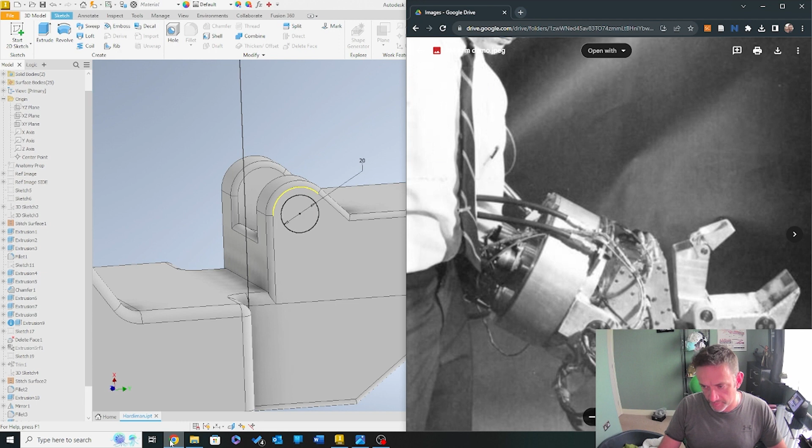Yeah, so I'm going to model the next piece the same way we did on the axe. I'm going to do the same thing here. So let's come back down to here, and I'm just going to go there. Put an overall geometric representation there, and given the size of what that is, that for me looks like 25, even 30 millimeters, but I've got 25 millimeters. I do need to confirm what that is on the actual wrist plate itself, but what you should see now is we're starting to get that overall geometry.

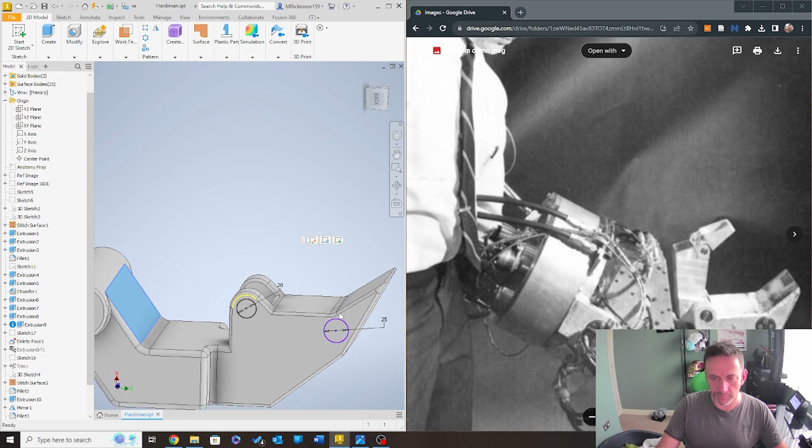So let's quickly compare what we got. Hell yeah, hell yeah. So we are one step further.

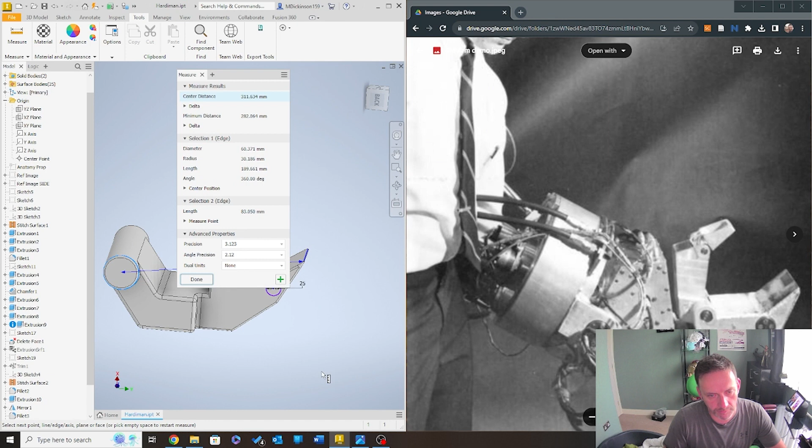Right, so let's do a quick dimensional check. If we just presume that coming from where his hand would be to here, it's just to give us a bit of an understanding. So that's 31 centimeters, 31 centimeters, so where his hand sits. Okay, so the delta of that tells us the actual length in the X and the Y. Okay, so it's actually 30 centimeters from the wrist point here right to the actual end point here.

After the video, I'm going to do a quick measurement on that, but I'm very confident that we're actually now in the right direction. This has been a successful video. I'm extremely pleased. Right, you guys, I am not going to rabbit on too much more. This has been really successful.

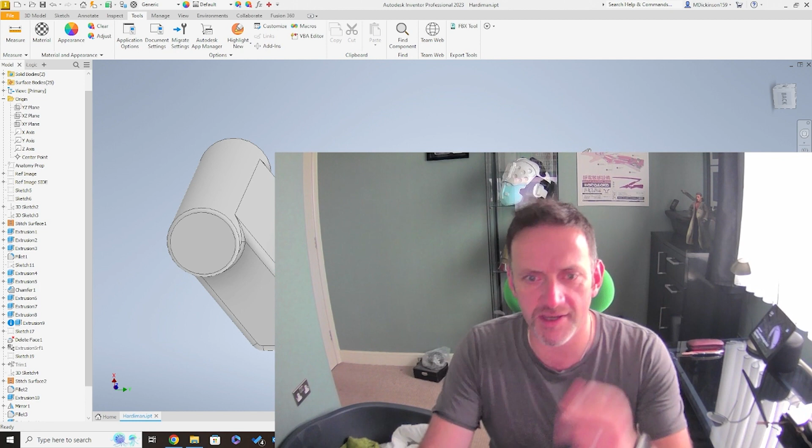My name's Matt Dickinson. We've actually been re-engineering the Hardiman original drawing that we did. We took a huge step back, but I think it was a positive step back because this is looking the part. I hope you enjoyed this.